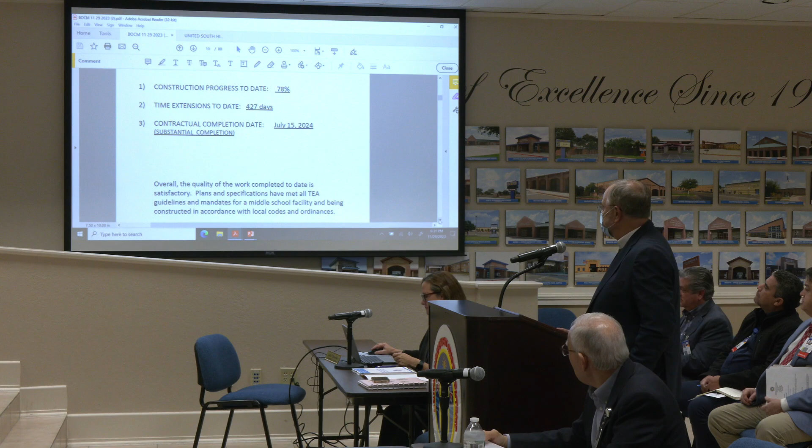As we're saying, we're past the three-quarter mark in construction. There were time extensions due to some weather and site conditions. As you know, the street there for Aquero Boulevard was being completed, so there's a lot of back-and-forth interface to work out timing on the project. So we are moving forward on the completion date, and we feel progress has been satisfactory.

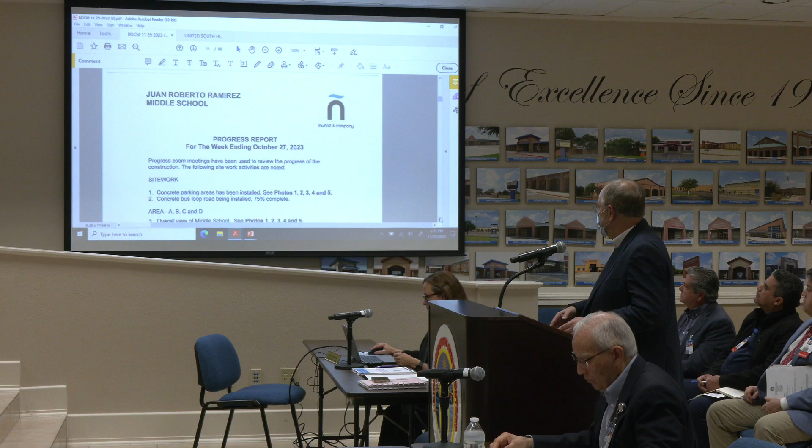Site work is still underway. The Bus Loop Road is being installed, so it's been graded out and we're starting to put in concrete, et cetera. We want to keep going on this. Let's see if I can put it up.

A little rusty. There we go.

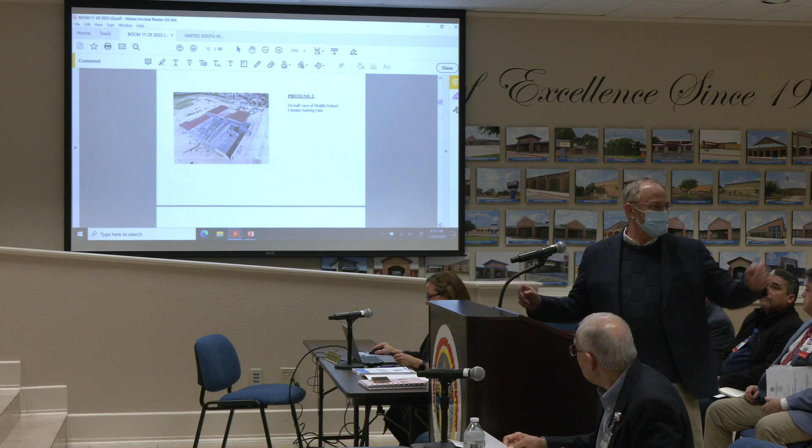So as you can see, we're not totally dried in, meaning the roofs are not over the whole building, but we have four areas of the building. I want to recognize Memo Cavazos, our partner architect on this one. The roof hasn't been dried in completely for all parts of the building, but underneath the roofs there's work continuing for electrical and finish out of the spaces, laying mechanical ductwork. The exterior brickwork is still underway, so we're pleased about the quality of the work. It's going to have similar colors to one of our other middle schools, with the difference being the red color of the roofing. That's all proceeding in place and as expected.

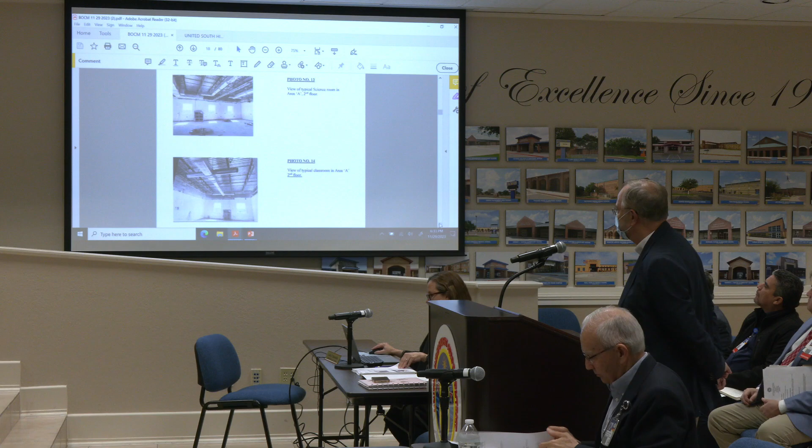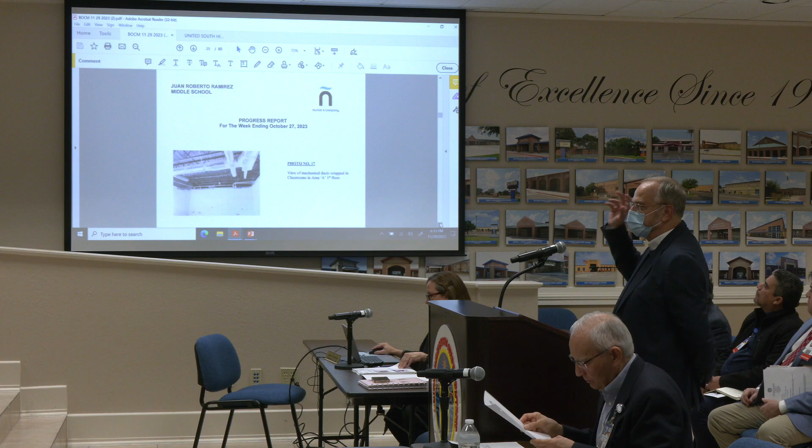Progress has been satisfactory. You can see some of the interior work happening with mechanical, HVAC, and electrical going in inside classrooms and down hallways. All of that infrastructure above the ceiling gets placed right now at this point. There's a view of restrooms, the toilet partitions that have been set up. Those will be covered in tile when they're finished. So that's the report on the project, and we're satisfied with the state of the construction.

Just to remind the committee, we had three middle schools in this bond program, and we used a prototype. They all have their own personality with their own colors and mascots. We're about to do a boundary meeting tomorrow with parents in the Mines Road area. This will bring relief to Washington Middle, which has over 1,000 children. Right now we have 20 portable classrooms, or 10 buildings, all being used. We're looking forward to splitting up the population there and putting our kids into this new building.

For the 2024 school year, right? That's right, that is correct. So all of this hopefully will be completed by then. We're actually having that meeting tomorrow night at Washington Middle with those parents who are going to be affected.

Let me ask y'all a question. The 427 time extension days - is that part of pandemic, rain, all of the above? Pandemic effects were part of that, getting delivery. That's back when we had supply chain issues going on, so there were impacts for things like electrical transformers causing delays - a big part of that also. Did you find those? Yes. Because they still haven't found them in a lot of areas, right? Yeah, it's hard to get if you haven't had an order in the queue already. And that's statewide, right? That's statewide - that's practically every project we're working on, San Antonio, Dallas, wherever. Okay, thank you, I appreciate that. Thank you for your presentation.

Well, luckily, it wasn't needed until the 2024 school year. Yes, I know it.

Bond program financial report, please. No, we're going to Clark - New Clark Elementary School. Clark, sorry, guys. That's fine.

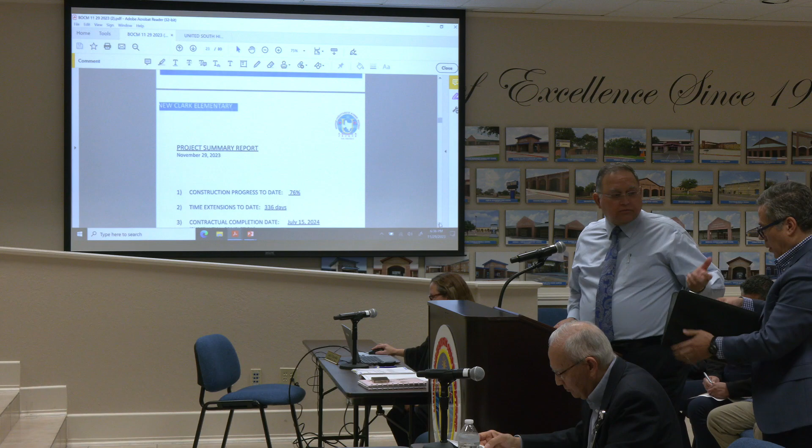Good evening, Madam Chair, members of the committee. Juan Romero Sanchez with JHS Architect, and my partner Eddie Quiroga, our project administrator. We're going to present a brief update on Clark Elementary, the new Clark Elementary School.

The progress today is about 76%. And we do have some extensions also.

Part of it is related, as Randy had mentioned earlier, but in this particular case at Clark, we had a lot of issues with soils. So there were delays in having to remove and replace a lot of soil in that area to bring the project up to the required elevations and compaction. That took quite a bit of time. That was a change order that was done and has already been approved. So our completion date, substantial completion as of today, is still July of '24.

Hopefully, again, for next school year. Yeah. You want me to go to the pictures?

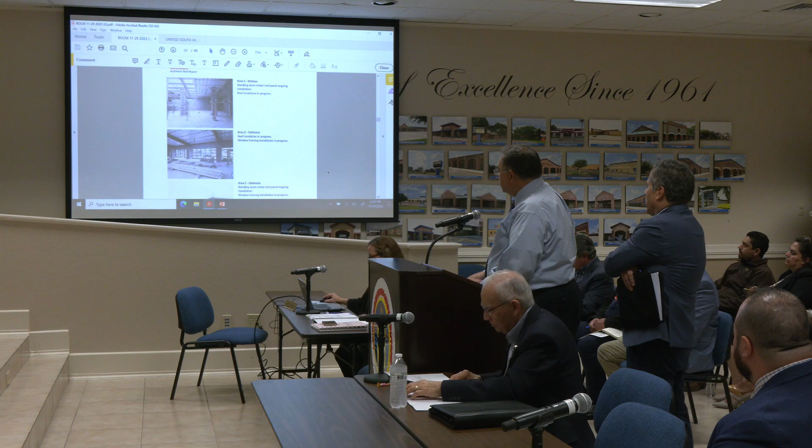Major work is actually the masonry. Until we completely dry it in, we'll be doing more of the finish work at the beginning of the year, I expect. Mostly painting, priming in the dried-in areas, portions of the building that can be painted and primed as far as finishes go.

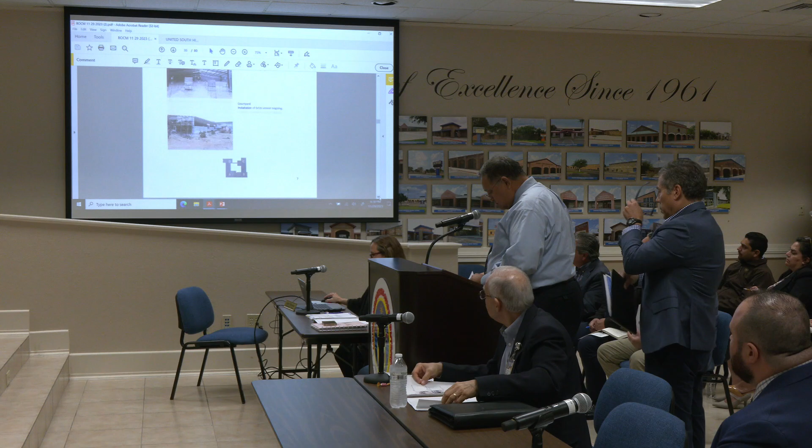Basically, the windows have been put in place also. And that's all. Be happy to answer any questions that you may have.

That looks good. So I think y'all can remember that we had six elementaries on a prototype that we started from the very first Vets Elementary. This would be the sixth one. The sixth with the same layout.

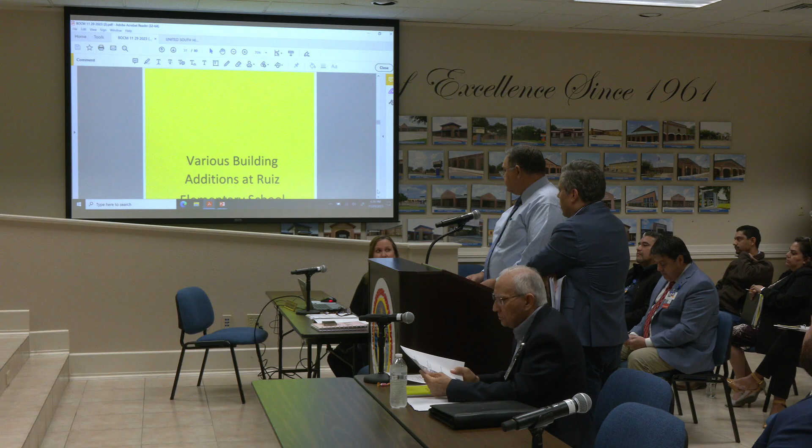Of course, it's accommodated to the site itself. But I think the elementary prototype that we've been using has been very functional. Our elementary principals are very pleased with the functionality of those buildings. So we're pleased that we were able to use the prototype in this program. Clark is a little smaller than the first five, so it's a little more compact because of the population there.

By having the school further back, you've got more area for queuing cars, which was always an issue there on Hillside. This is going to be a big help to that whole area.

Yes, we were fortunate to have land behind Clark Middle that we were able to utilize. The plan is to keep Old Clark Elementary, probably to repurpose it for departments that service our families.

That's kind of the initial plan right now. Of course, we need to sit together as administration and the board and decide how we're going to use that building, but I think it'll be very useful. It's right off of Hillside, very visible to the public. And if you've been to the back of central office, we have many portables back there. Those are the departments we're thinking of maybe moving to the old Clark Elementary.

Good. Great. Thank you. Thank you. Thank you.

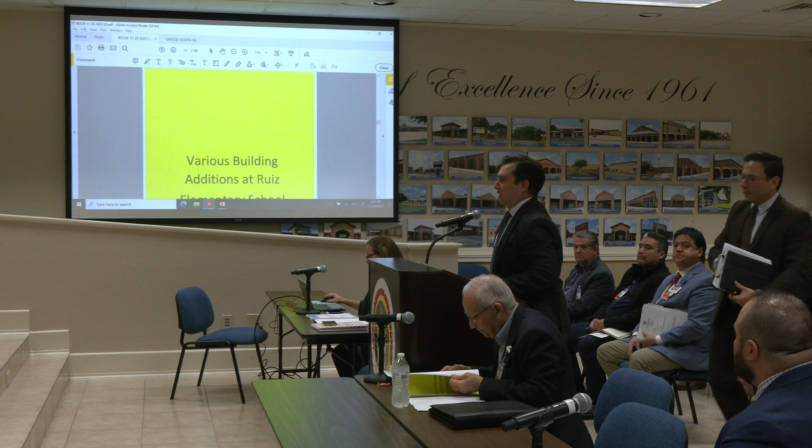This is the various building additions at Ruiz Elementary School. This is a project occurring in 5 phases, and we are currently in the final 4th and 5th phase of the project. The project's scheduled to be completed on the 15th of January.

I added some pictures to the slides, so they won't match your hard copies there, I apologize. But if you look at the screen, you'll get a better idea of what's going on. Phase 1 was to convert 2 classrooms into an SCU unit, which has already been completed, as you can see by the photos. Turned out very nice.

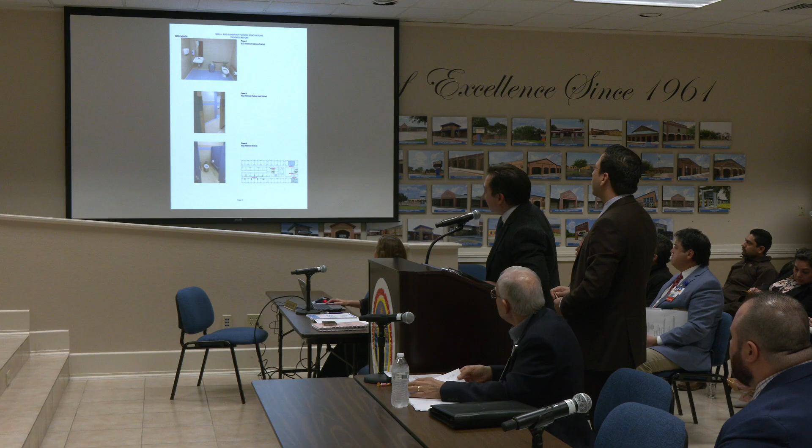If you go to the next page, at the top you can see the restroom in the self-contained unit. Phase 2 was boys and girls restrooms on the south end of the school. Those got completely renovated, all the finishes, fixtures, accessories, and what have you, made it ADA compliant. That's completed, you can see that in the photos there.

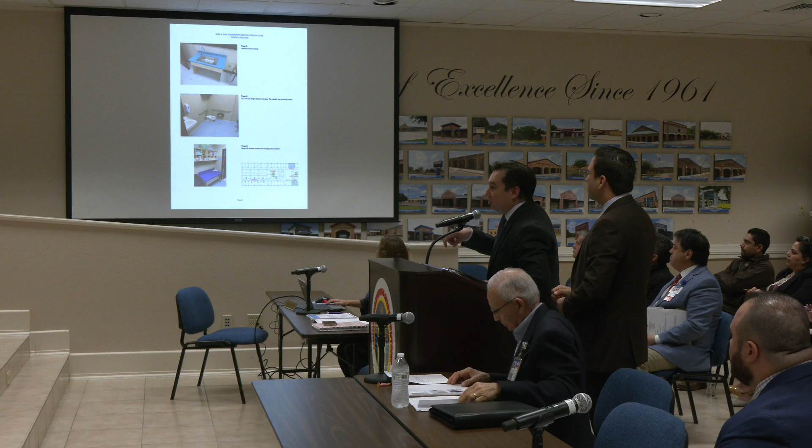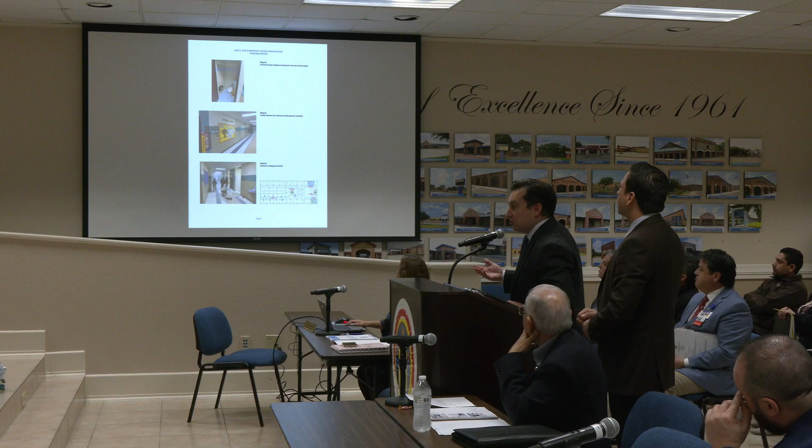Phase 3 was to renovate 13 individual single-user restrooms in the pre-K and kindergarten area for the little kids. So those little restroom units got renovated with new fixtures, new lights, new exhaust, etc.

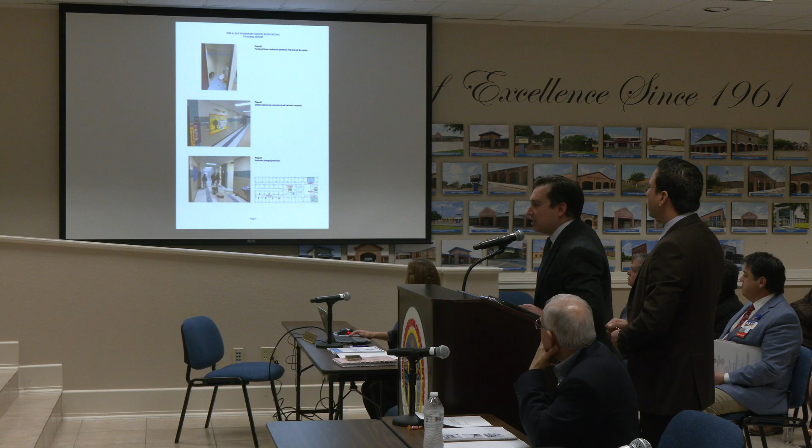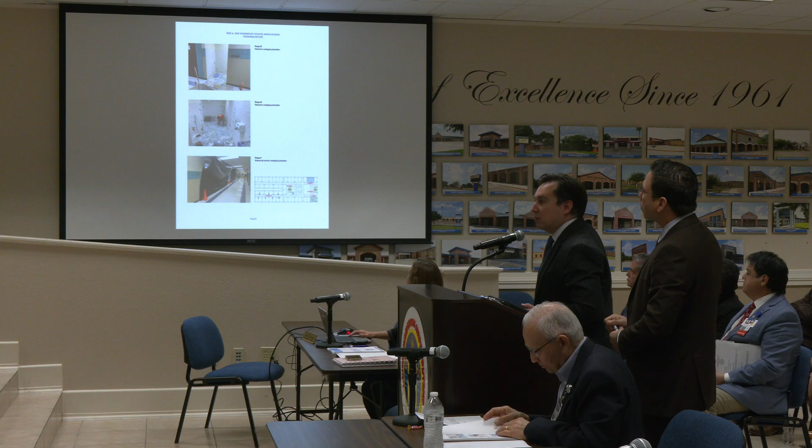And phase 4, which is going on right now, they're converting 2 classrooms into a science lab. That's already towards the tail end. They're putting in the finishes this week, so that should be wrapping up soon. And then there's another pair of boys and girls restrooms at the north end of the school, similar to the ones that have already been redone. Those are going to get renovated, and that's currently in the demolition phase.

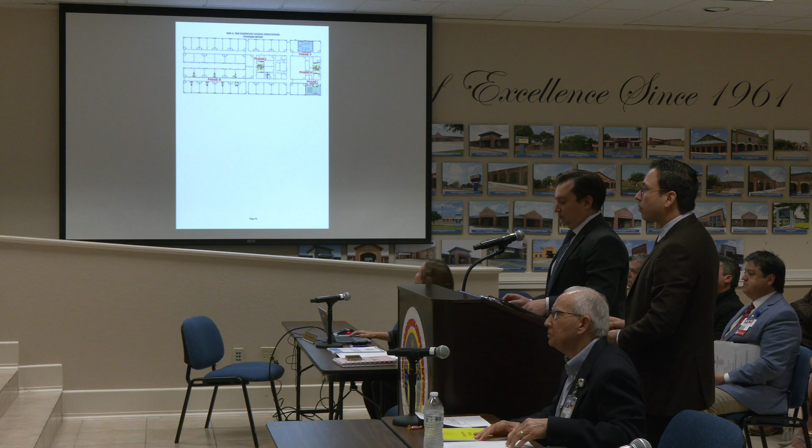But it looks like it's on schedule, so should be done by mid-January. Do you all have any questions? I think it looks good. Mid-January. Yes.

What was the initial, Madam Chair, if I may, the initial project cost, or I guess projected estimated cost versus what actually got awarded to the GC? Final contract, it was lower, off the top of my head. I don't think I have that. We can discuss that in the financial report.

Oh sure, we have Reese Elementary outlined there, the 3 projects that got awarded. Remember we were going to replace Salinas Elementary, and then our board asked if we could come to y'all and say, can we repurpose these funds for some other projects at United South High School? I was curious if there was an opinion of probable costs versus what the final outcome was.

I actually had the same question for Mr. Sanchez and Mr. Quiroga on the Clark project. Just curious about that, how that turned out. I think our opinion on this one was pretty close. Okay, yeah, thank you.

Good evening, members of the committee. My name is Andres Rubio with KCI, we're the engineers of record. I'm going to be presenting the Aquero Boulevard 90-foot right-of-way extension, or just a progress update.

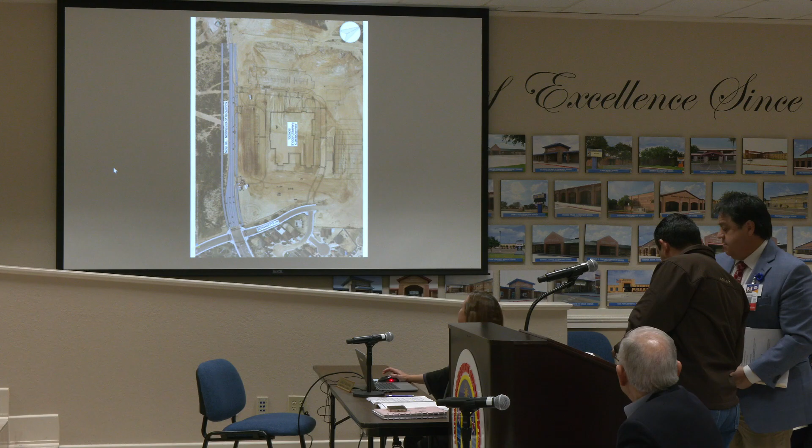There's 3 driveways to the school. And that is for the- yeah, that'd probably be better. So like I said, it's going to be 5 lanes here, pretty much mirroring whatever's on this side, and then taper down to 3 lanes with right turning lane for the school.

This is just phase 1 of this road, and it was designed for future expansion of the road, but that's going to be done by the City of Laredo in the future, in case that's ever needed whenever this site is developed. And I guess a bridge constructed here, there's a huge drop down here, a huge creek. Yeah, that's pretty much the creek up there.

So as I understand, this is the bus loop right here. They enter through here, they come out through here. But again, I'm going to focus on the road. We have 12-foot shared use paths on both sides of the street, basically 6 feet dedicated for pedestrians and 6 feet dedicated for bike lanes, on both sides. And then there's a buffer in between the curb and that sidewalk, which is basically going to be landscaping on both sides.

Let me ask you, on the bike lanes, is there some kind of concrete separation from the actual traveling lanes, or is it all just striped? On road, the actual road, there is a buffer, like a 4 to 5 foot buffer from the road. So that buffer is what? That's going to be landscaping - just landscape? Yes, trees and grass.

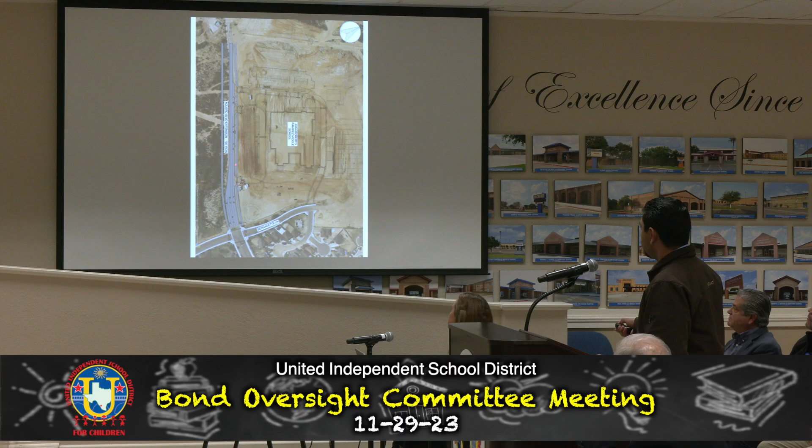And pretty much it was 90-foot right of way, but then the city asked for the school to dedicate another 10 feet so we can fit all this in there, which is the 12-foot lanes, 12-foot shared use paths, and then the whole width of the road. So it's 100-foot right-of-way dedication. What is the size of your travel lane? It's 11 feet, 11-foot lanes. It's 5 lanes here, and then again it tapers down to 3, and then 2.

Approximately, it's approximately 1,200 feet in length up to that point.

I don't know if you want to go to... any questions? I'm sorry.

Progress report: right now, all the utilities have been installed. Pretty much the base, caliche, and the curb and gutter are already placed. The contractor's working on the subgrade and base for the shared use paths and driveways, which are going to be made out of concrete into the school. There's been coordination with the site civil from the school so we can match the grades and elevations. We're also coordinating with AEP.

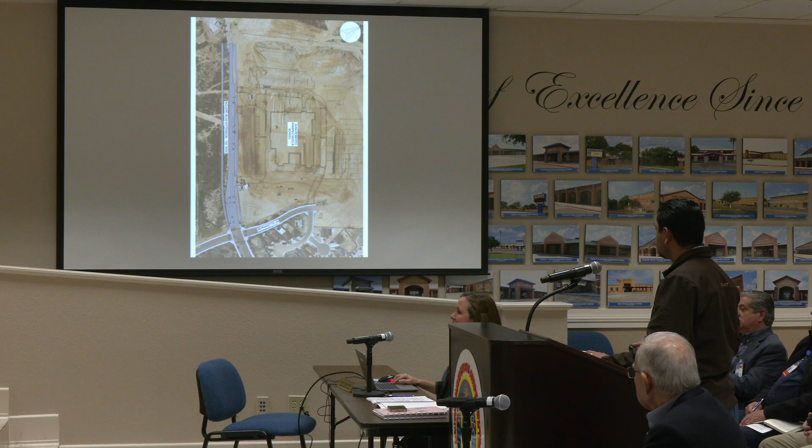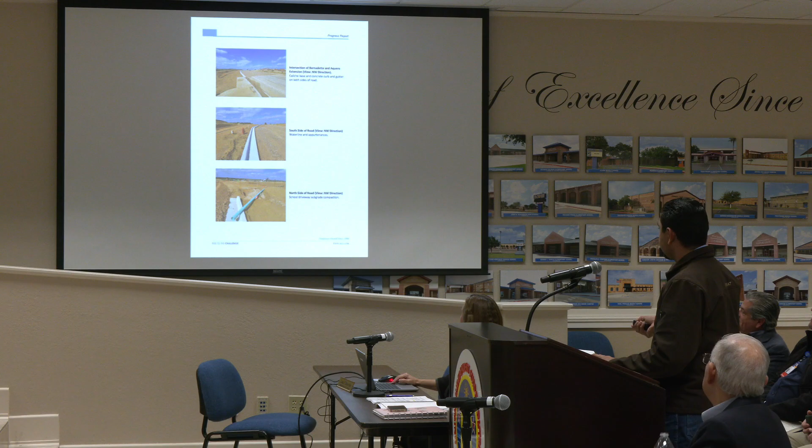Thank you. I have some photos there, so far showing what I was saying. They already placed the caliche around the road. We have the curb and gutter, you can see it here. All the utilities are in place. There's a picture of them installing some conduits for irrigation, and that's going to be a driveway there.

So this is just some additional pictures so you can see the road in relation to the school. And this is the electrical trenching for the light poles, and those are where the meters are going to be, for irrigation and domestic use. Some more pictures just showing the road and the base. That's it.

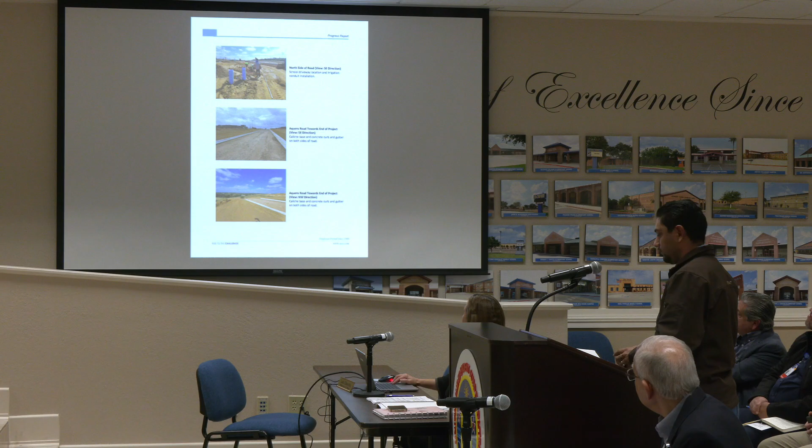Yeah, that looks good. Any other questions? Thank you. Thank you. Thank you. Okay.

Bond program financial report, Mrs. Benavides? We just wanted to, back in 2014 when we started having our first meetings, this report I'm about to show you had a lot of zeros in it. But now, Sam and I talked about this, there's just a lot of numbers on this report, but we wanted to focus on tonight's project, which is United South High School. This was one of the projects that our board members had asked about—it's a fine arts building, relocating ROTC. We'll have a presentation, but we did set aside $10 million for this project.

United South Middle School science labs is $1 million, and the Reese Elementary, we had budgeted $1 million. You'll see that the amount expended to date is $741,000, and still encumbered is $258,000. So it was pretty close—I think we tried to stay within budget on that item, on the work at Reese Elementary.

Mr. Rangel and I had this really big discussion about inflation, and I think we were fortunate that the bulk of our bond program happened when it did, because for probably the last 3 years, tied to the pandemic, we've seen escalation in prices, just trying to award and complete what we told our public we were going to complete. So in talking to Mr. Flores and our finance area, we were like, okay, how are we going to make up this $6-7 million deficit? Our plan is to propose to our board that we set aside funds for the next 3 years. We were told it's going to be about a 3-year project.

We're going to use the 10 million from the bonds, but we'll use $2.5 million the next couple of years. We received Webb County School Land funds that we actually used to build the pool. It's been a misled idea out there that we use bond money for the pool, and we didn't - we used general fund money and Webb County School Land money. It was the board's decision to earmark that money for the aquatic center that we built at the SAC. Now that that is built and fully paid for, we're going to recommend to the board to set aside those funds that we get annually to finish building this project. We feel we owe it to the kids there at United South High School.

Makes sense, yes, it's a beautiful building, it will be. So you said it's a 3-year project? It's about a 3-year project, there's a 2-phase project. The first phase is from February 5th, 2024 through August 5th, 2024, and phase 2 starts right away in August 2024 through June 30th, 2026, with the final completion date of July 31st, 2026.

2026, yes. Perfect. Okay, I have a question. Would it be out of order for us to see the presentation from the architect so that we know what we're voting on before we call for the vote? Can we show their presentation? Sure. I'm going to go ahead and step aside and come back for any procurement questions. I appreciate it, thank you.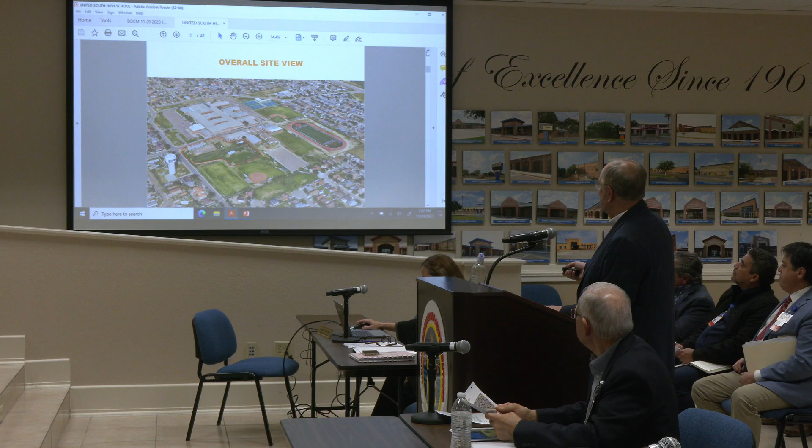And then there's a new drill pad for JROTC and driveways and parking, okay. Here's an overall site view. Go back, yeah, just to show, here's our building site in the red. And so there's parking over here, there's some other structures and elements, but this is the obstacle course.

All of this, we could build right here because the rest of the site was pretty full with playing fields, and you've got the big band pad for marching and the other playing fields. So this was the place to put a new building. But to do that, we had to move things out of the way. So if we can go to the next slide, this gives you the overall sense of the project.

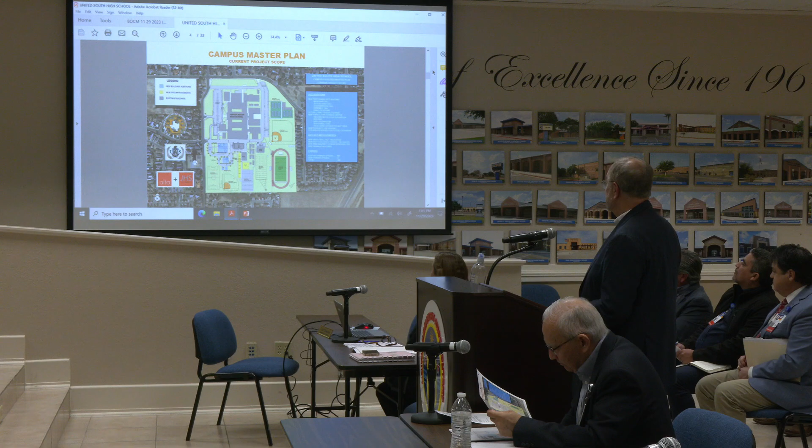The buildings in blue here, that's your performing arts. There's the ag science, and these are the animal pens and greenhouse. It's sited so we pushed it up to the bus loop, so there's a connection as close as possible to the existing school for students to cross, and there's a pathway all the way down here. These yellow areas are the obstacle course and the new drill pad, and we've created enhanced wider walks for the band to access the marching pad down there. So we're covering a lot of area, but it's probably every bit of the space that we have left to build on, pretty much.

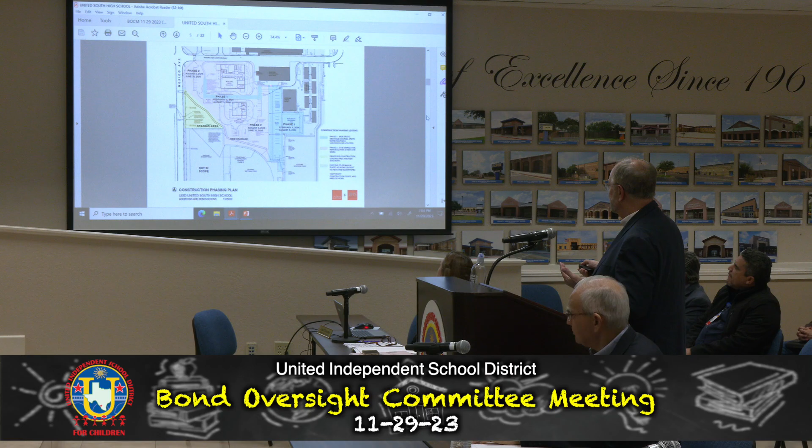Because of the complexity, you have to move things out of the way to start the new work. It's basically a two-phase project. You can see the first phase is relocation of the obstacle course to this location here. It's exactly the same size, has the same stations on it, but it's going to be up to current U.S. Marine Corps standards, which have some safety features that they didn't have in the past. And then your drill pad.

Part of the thing we had to deal with, there is water that comes in off-site from the residential area here and was sort of filtering across the site helter-skelter through some swales. So we've now controlled it to make our building pad here, and it goes to this new flume and discharges on Mexico Avenue. Okay.

So the site improvements: we've got additional parking, replacing the parking that we took away, so we're building new parking. We have the new sidewalk to the band pad, relocating the drill pad to be closer to the JROTC building, which is better for the students. The obstacle course is also closer to the JROTC, so it's like a little complex. And future facility expansion—this has some more space, so if another bond comes and you want to do more expansion, you still can.

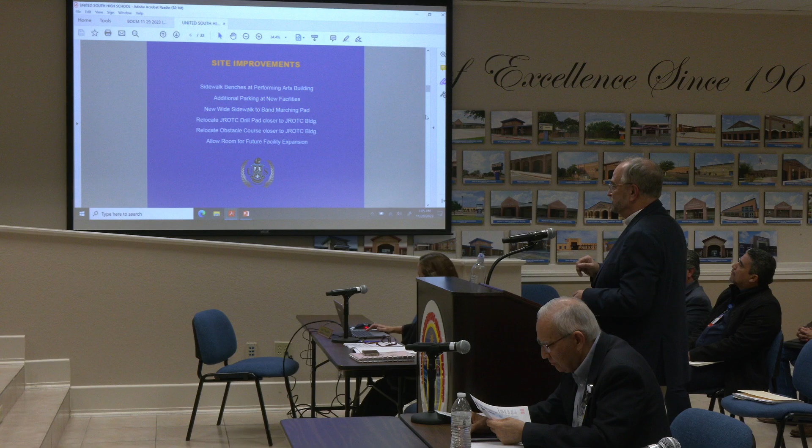And those are improvements from the prototype, or improvements going on in addition to it? In addition to, yeah, straight from the prototype project, where you're moving things out of the way.

So to make this all work, we have our performing arts building. We created a loop around the building for access, because you have to load and unload if the band's going to play at a ball game or whatever. We have a turnout here with a protected enclosure for the band trailer, which will be parked within the fence. Then you have a secondary loop that ties into that for the Ag Science building, sized to let trailers come in, so if you want to unload sheep or whatever for shearing, you can do that, and the greenhouse is also accessible.

The pathway from the existing school for students is primarily along this delineated freeform path that's in the paving all the way down, and that's how it all flows together into a nice complex.

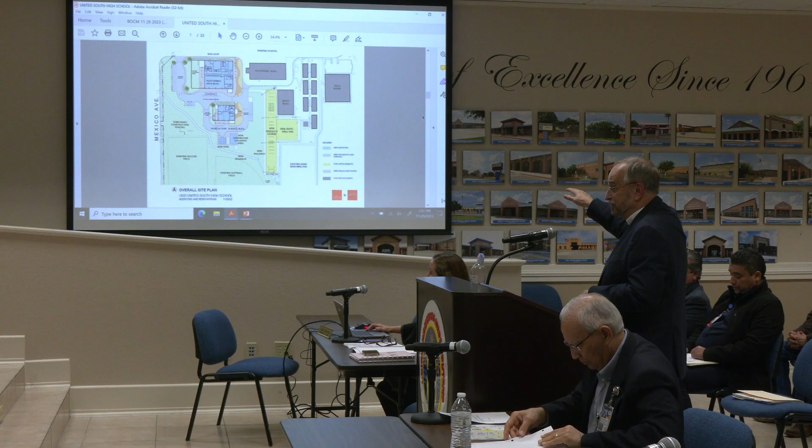Looks really nice, it flows very well. I think it does. There's also the issue of a lot of fall on the site, so some of the expense is because we wanted the school to be up where it's accessible to the existing school, so students can just come straight across for accessibility.

So the new performing arts building, the band hall, is very similar to what's at Alexander. We do have some tweaks and improvements to it, but these are all the same features.

If we go to the plan—this is your main entry, so students will come across at this point and travel. We have a covered canopy, and along here we're including seating for students to hang out outside. This is a secondary entry, but really it's another place where you can unload instruments for an event. We'd have overhead doors here that let you unload directly into where the band storage trailer is, and the other spaces are very similar to what's over at Alexander.

There is a mariachi program, so we do have one of the practice halls dedicated to that. This is a view of the building.

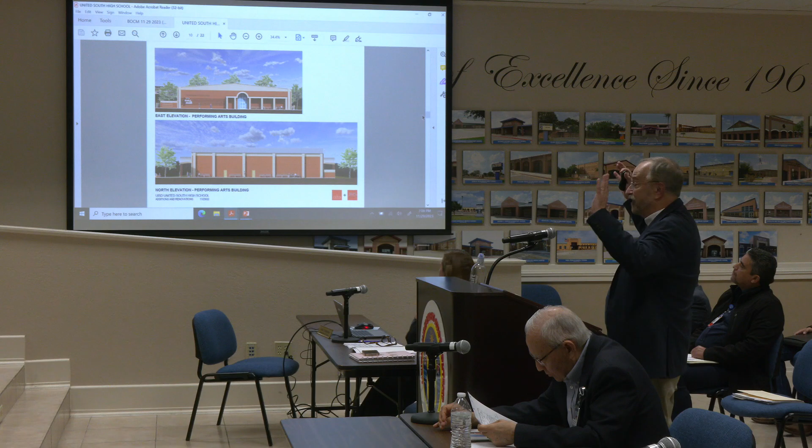We wanted this one to be the same volume structure, matching brick to the colors of the existing school. And because the existing school has these interesting arches and an arcade along the front, we're bringing that element over into the main entry.

This is the side that faces the existing school, so students come across, come here, and then go into that main big corridor. The fun thing we're doing is delineating the musical scale in brick, and then we'll put the logo of the band program here for the clef—it'll be a great feature. We have something similar over at Alexander if you've all seen it.

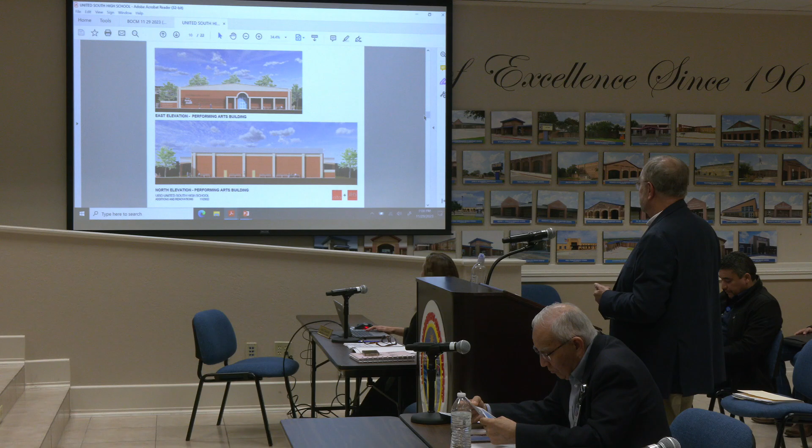And at Alexander, do they have the obstacle course as well? No, they don't have that. What is that obstacle going to be, grass or turf? Right now I don't think there's a lot of grass underneath it, it's basically dirt.

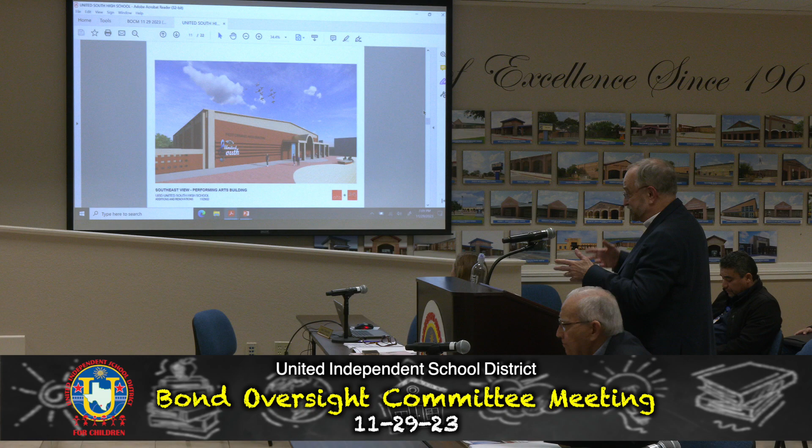To build it, the Marine Corps has recognized there have to be some safety standards. So in researching this, we're actually going to have a soft fall area where we have climbing ladders and such with some height, so if kids fall, they'll have something softer than ground to fall on. If you're looking at what it is now, it's going to look pretty amazing when it gets done.

They didn't have that in our day. Nope, I know.

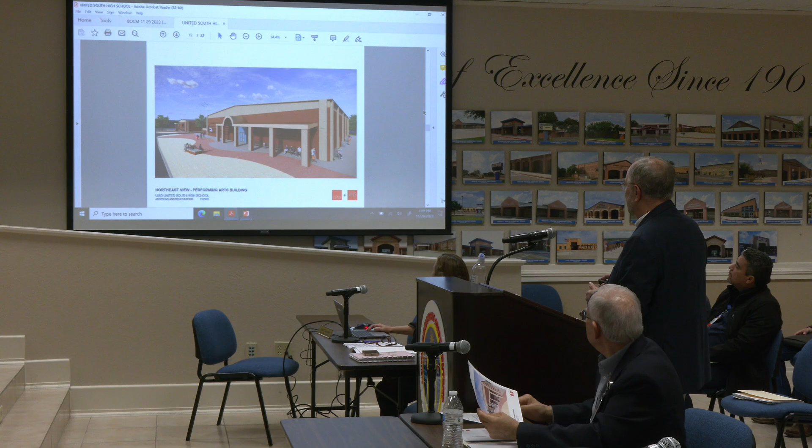So this is just another view of the front, the canopy and the seats, and such. And you can see in the distance there, you just walk across and there's your access to the Ag Science building.

This is the view in the main corridor. It's a little different from Alexander. Because of the arches at the existing school, we vaulted the ceiling down the corridor, and you can see these little patterns going on here. These are going to be a replication of the notes of the school song, and we're going to put the pattern on the floor.

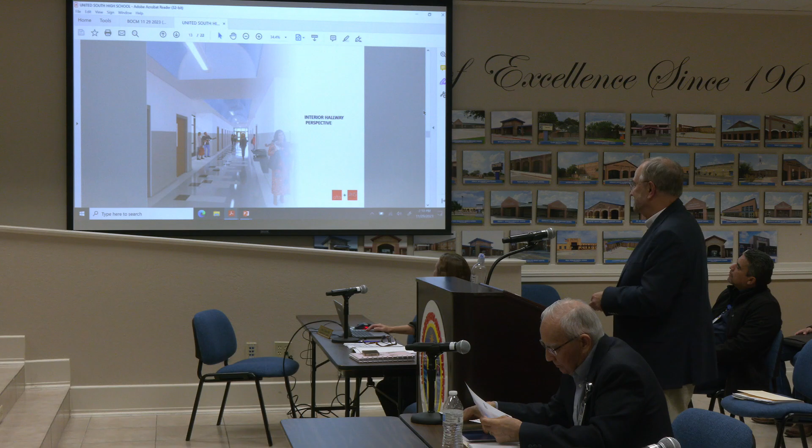How cute, that's cool. What did that cost? It's really nothing, because it's the same tile just a different color, so it's nice when you get something for nothing.

Agriculture Science Center—so this is all the elements that you've got. We can just go to the plan, I think. So you come in, you enter here.

There's an ag classroom at this location. You have an ag welding shop, but there's also metalworking, not just welding—we have six stations, one additional welding station than they had at Alexander. We've also incorporated power for portable welders outside under the project area. We didn't have that at Alexander.

And there's an ag classroom and an office here with glass, so instructors can be in their office and look both ways and surveil what's going on in the classrooms.

So all of this is equipment that'll be provided by the district. We've located them, and the other thing we've done here is we have a bigger project covered area than we had at the other school—all based on experience and such.

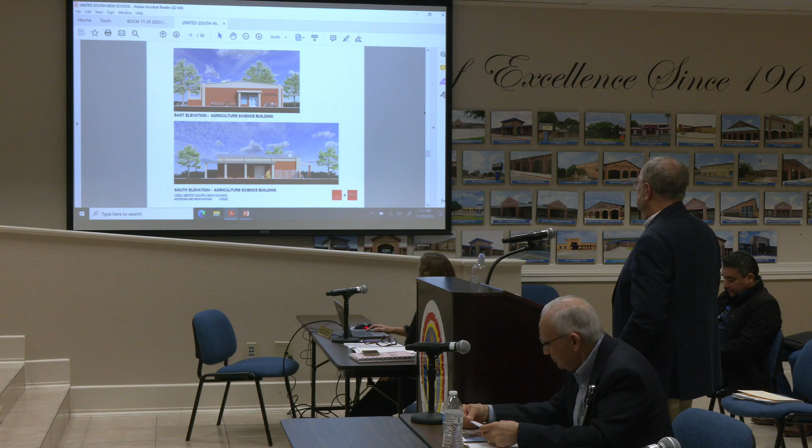So here you can see it's essentially the same building, except you've got more canopy area than what you had there, and the colors again replicate, kind of like the column—these pilasters and the lighter colored brick, tying back to the main school. There's a view, so it's a very nice facility.

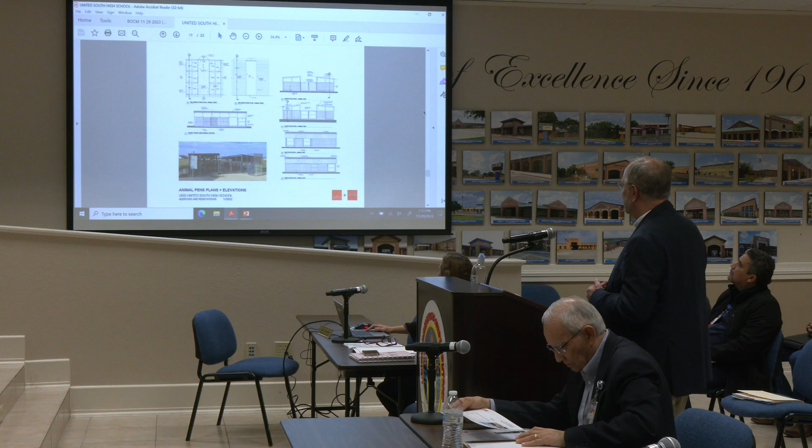This is a look at the greenhouse—a packaged greenhouse. We designed the slabs and infrastructure and everything, and this has actually been brought in and erected on the site, exactly the same as what's over at Alexander. Then the next same animal pen structures have water and power, etc., for use there.

Because of the nature of the site, one of the things we have to do is move the easement to a transformer—we actually have to relocate the easement feed and install a new transformer. Because of questions about what's in the ground, we thought it prudent to do this.

So all the allowances, the portions that are not used, return to the district. Okay, is that one more? Then the project schedule.